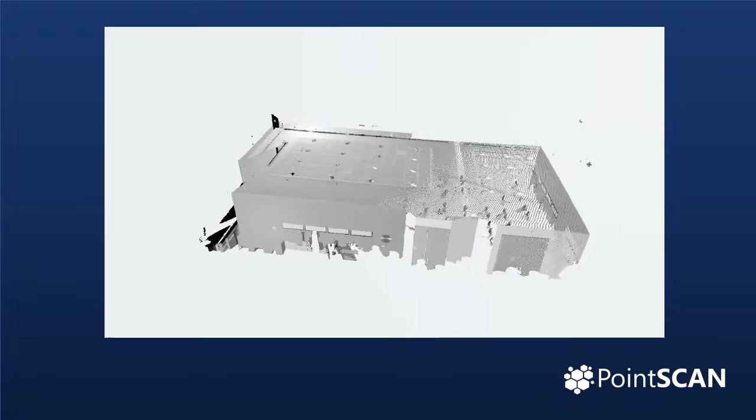For those of you who attended the recent event at Reading, you would have noticed a scanner at the front of the room. So before I begin, I just wanted to demonstrate how quickly data can be acquired from site.

As the scanner rotated, it was acquiring up to 976,000 points of information per second. This data was then converted into a measurement and built up a 3D image of its surroundings.

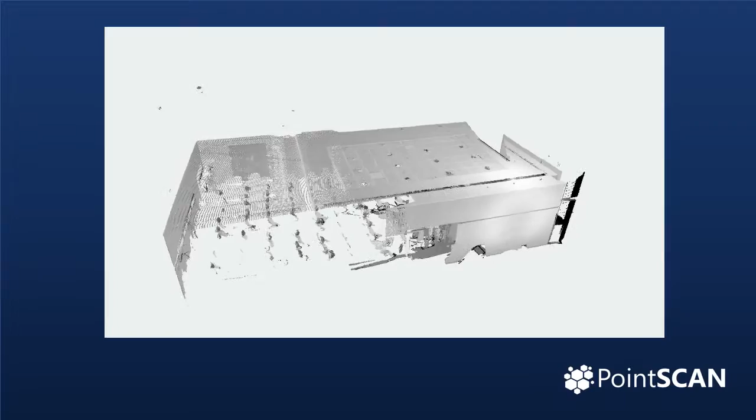As you can see from the video, in this case, after a simple registration process, a 3D image was created of the conference room. The scan duration was 3 minutes 15 seconds, and in that time the scanner recorded over 27 million points of data.

The scanner does work on line of sight, so in this example it would appear that there are areas of information that are missing. However, this is easily rectified by completing scans from multiple locations.

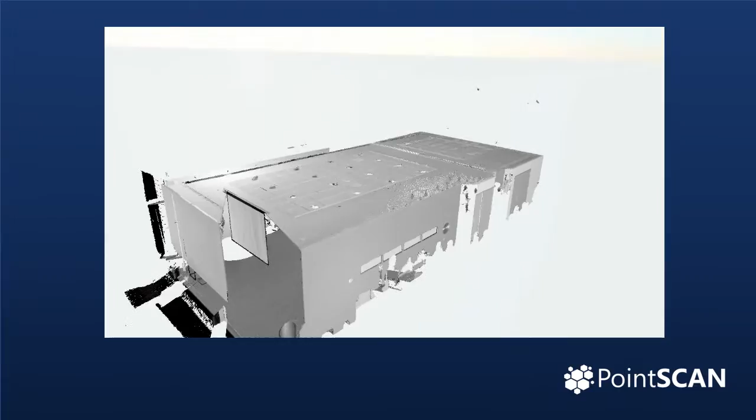So even raw scan data, as you can see on the screen, can provide a graphical representation of the room and its contents. And this information can be interrogated to take measurements, volumetric data, as well as full color imagery.

The point cloud data is also supported by higher quality images which can be viewed through the planar format.

Coming from a project management background, I wanted to show how 3D laser surveys can benefit project performance rather than just being a tool specific to the design and CAD teams.

Making changes to any process or procedure shouldn't be taken lightly. But a wise man once said, if you do what you always did, you will get what you always got.

So I believe there are 3 simple questions that should be asked before making any changes. Can it be done better? Can it be done more efficiently? And can it be done safer?

So can we improve on what we're already doing? Well, they say a picture paints 1,000 words, or in this case I should say numbers. And there is no doubt that a 3D scan captures more data than a traditional manual survey. But it is the utilization of that data that improves this technology over traditional methods.

As with a traditional survey, 3D data has the capacity to provide information for the design and CAD team. But it also creates opportunities for the entire delivery team to visualize the project. This encourages early development, and by immersing yourself in a 3D environment, it becomes easier to identify potential problems and design changes when compared to 2D drafting data.

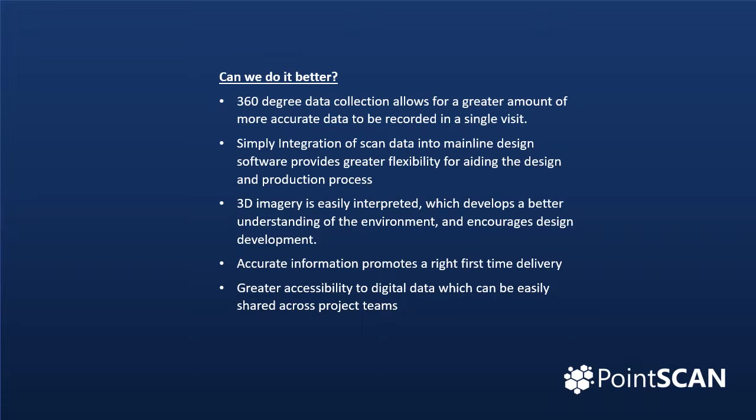We have proved that 3D laser scanning can reduce on-site data collection times by up to 80%. And because the data is so accurate and instantly available, design programs can also benefit, especially with no need to return to site to collect additional data.

And with the final design now free from error, you can minimize any need to make costly changes during construction. It is important to remember that by using this technology, we are saving costs that you do not necessarily budget for - program delays, reworks for example. The real cost comes in delivering the project right first time.

Okay, we already know that we can reduce the amount of time we spend on site, and statistics show that the less time on site, the fewer incidents and accidents are recorded.

But due to the capacity of the scanner, we can also capture data from up to 330 meters, which gives enough flexibility to take site measurements from the ground or at least a safer area on site. This means that there's no need for expensive access equipment or working at heights.

Further risk can be reduced by remotely accessing the scanner, again from a safe location. This allows for the entire delivery team to have access to restricted areas from the safety of an office environment.

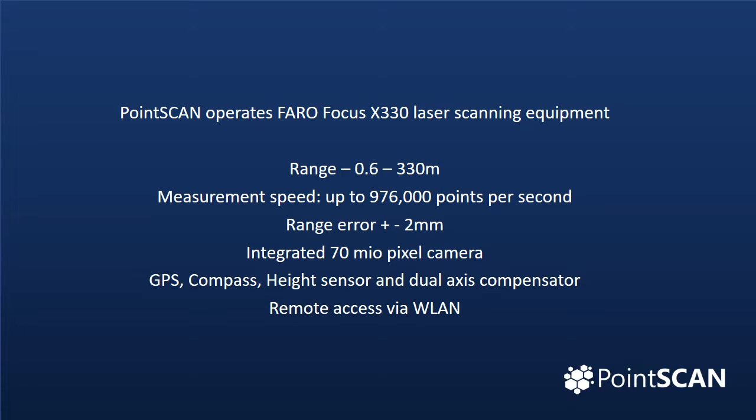We all know that technology is continually improving, and we are committed to providing the latest in equipment. I've already mentioned most of its capabilities, but an important feature is the GPS, which allows us to geo-reference the scan data with local and global coordinate systems.

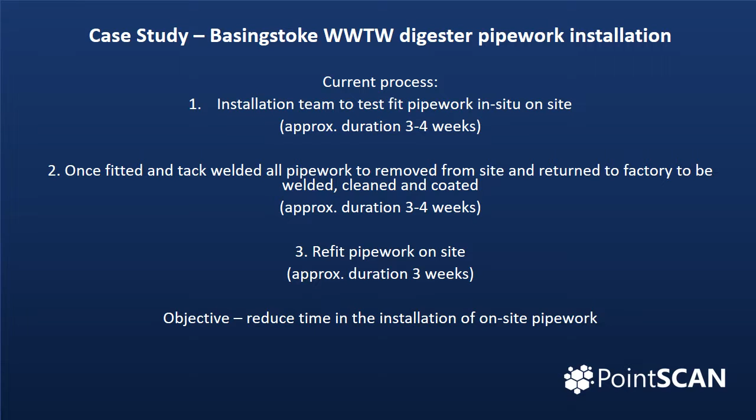I wanted to finish with a case study completed for FSD at Basingstoke Wastewater Treatment Works. FSD were contracted to install pipework across the site, and as you can see, it's a very labour-intensive process. Before any manufacture could take place, dimensions needed to be verified against the original model, and it was noted that there were variations. We were asked to attend site and complete a laser survey.

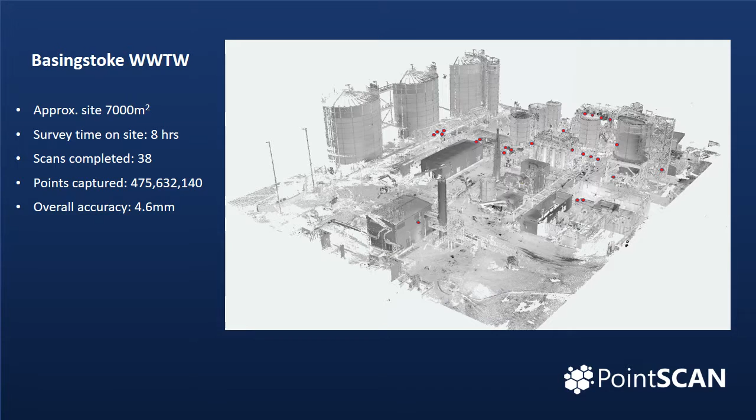The objective was to record the location of known flange faces from across the site to enable the manufacture of the pipework. The site was approximately 7,000 square meters, and 38 scans recorded over 475 million points of data within an 8-hour period. The overall accuracy of this project was 4.6 millimeters, which was well within the tolerances agreed with our client.

So by completing the 3D laser survey, we identified 54 individual flanges on site. These were then recorded in 3D space. This information was imported into FSD's modelling system, and they were able to create and design their pipework based on the information provided by the 3D scan. This allowed the manufacture of pipework to be delivered to site and fitted error-free.

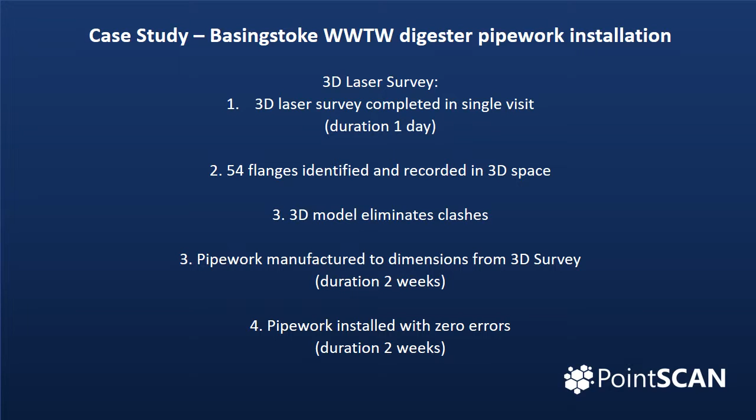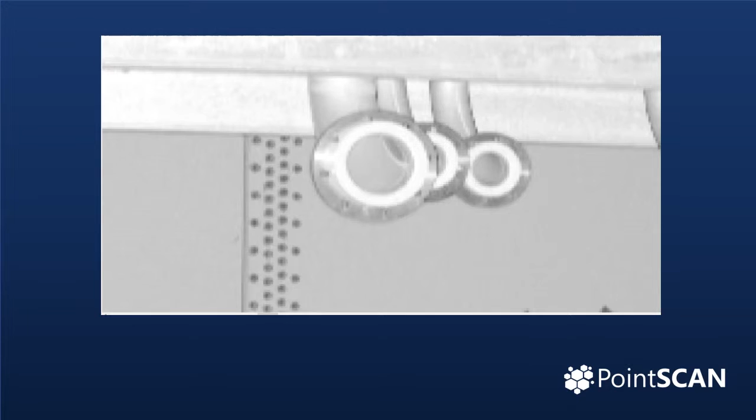This slide shows how easy it is to take measurement information from the 3D scan data, in this case taken from the planar view. It's also interesting to note that by the time this scan was completed, it was early evening and the site was in darkness. But because the scanner does not need natural light, it easily identifies the location of the pipework.

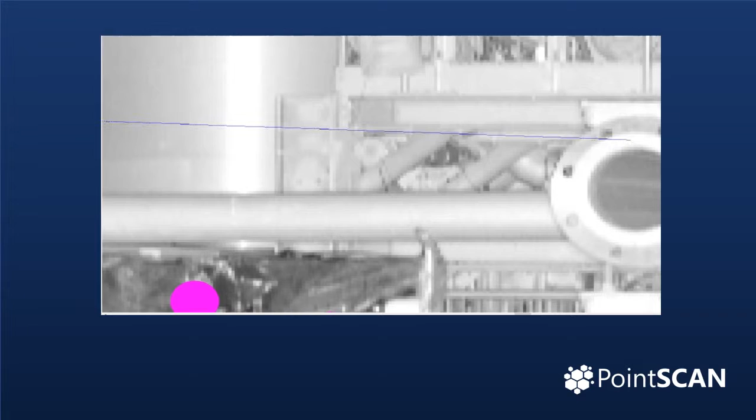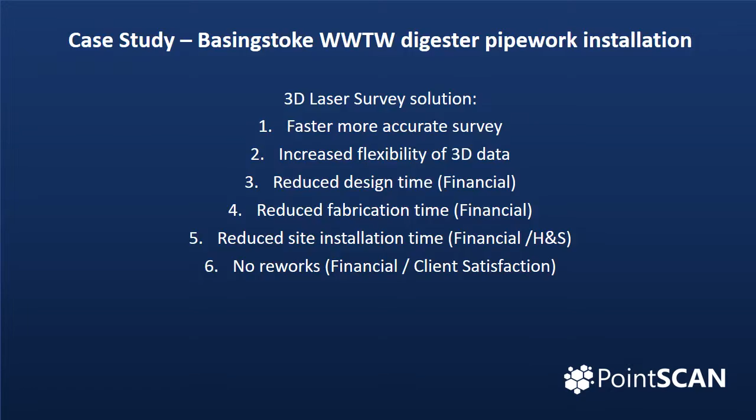The 3D laser survey provided a number of solutions on this scheme. From the provision of accurate survey data, the pipework was designed, manufactured and installed error-free. So, how did we do? Well, I believe we've done it safer.

We've reduced the amount of time that the survey and installation teams have spent on site and minimised any working at heights. We've done it more efficiently, again by reducing time and eliminating reworks.

And I believe we've done it better. We've increased the data capture, we've shared the information with the project and delivery team, and we've given confidence in design and customer satisfaction.